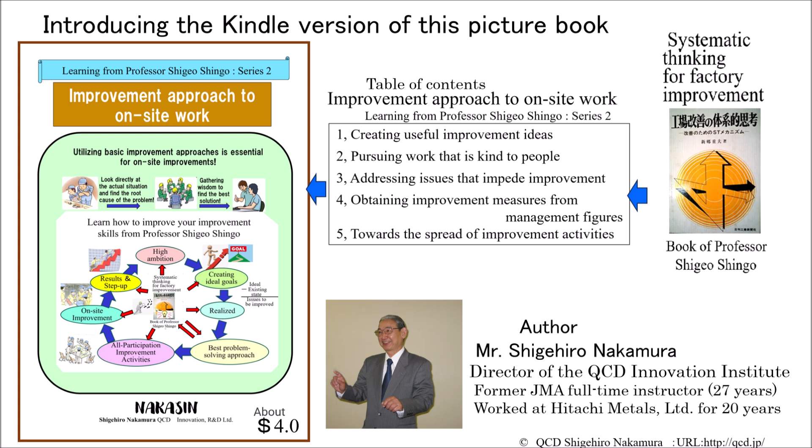This time, I will be introducing the world-famous Series 2 of Systematic Thinking for Factory Improvement written by Professor Shigeo Shingo, and how to use it in a picture book, focusing on the contents that Mr. Shigehiro Nakamura NAKASIN actually used.

Repeated successful experiences improve a person's abilities and life, not only for famous athletes, but also in different industrial sectors. There, people seek more value in life, and valuable information, along with wisdom, awareness of problems and curiosity, should become the subject matter. This figure shows a shortcut to succeeding in the manufacturing industry, but in Series 2, we will introduce how to make use of Professor Shingo's calligraphy along with the contents of this figure.

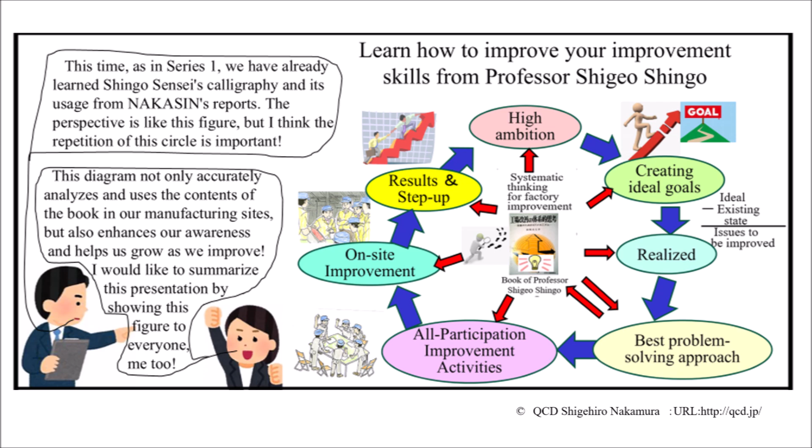Professor Shingo realized how to innovate manufacturing technology when he visited a German company. Die casting is a type of equipment that injects aluminum into a mold in a short time to produce efficiently. However, this method causes burrs, which are aluminum that leaks out from gaps in the mold and hardens, which is a problem that all companies face. However, there were no burrs at the German company he visited. The reason for this is that they used a method of removing air from inside the mold before casting.

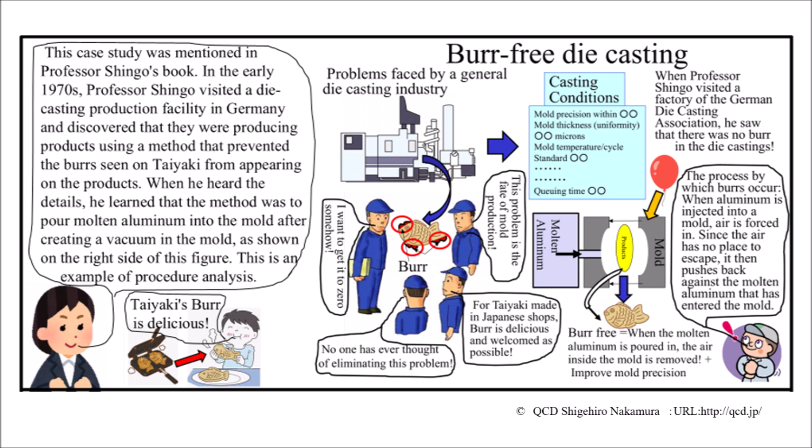It may seem obvious, but burrs are generated when the aluminum is injected into the mold at high speed, and the fixed mold opens due to high pressure, which opens the mold into which the aluminum is injected. During this visit, Professor Shingo realized that the problem is that we don't notice the air. Furthermore, he thought that the act of questioning things that everyone has taken for granted is the basis for innovation in manufacturing technology. This is also the main point that will be introduced in this series.

I would like to introduce an example that is similar to the previously mentioned measures to eliminate burrs in die casting, but which requires awareness when applied to a different type of work. In the industrial world, there are consultants and improvement instructors who insist that standing is the norm in manufacturing. In response to this, Professor Shingo's scientific analysis results in the figure shown here. Obviously, if you try working yourself, you will immediately understand that if you choose to stand up to do work that can be done while sitting, you will get tired and your efficiency will decrease. But why do these people insist on working while standing?

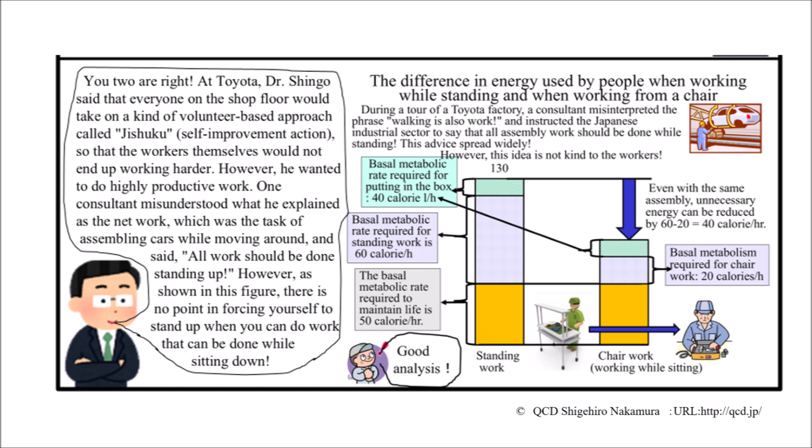After much deliberation, Professor Shingo came up with the idea while in the car on the way to the new location. I want the veterans to focus on the knife work. The temporary workers will only be in charge of peeling. He returned to the factory, and this measure not only reduced defects to almost zero, but also increased productivity by 1.3 times.

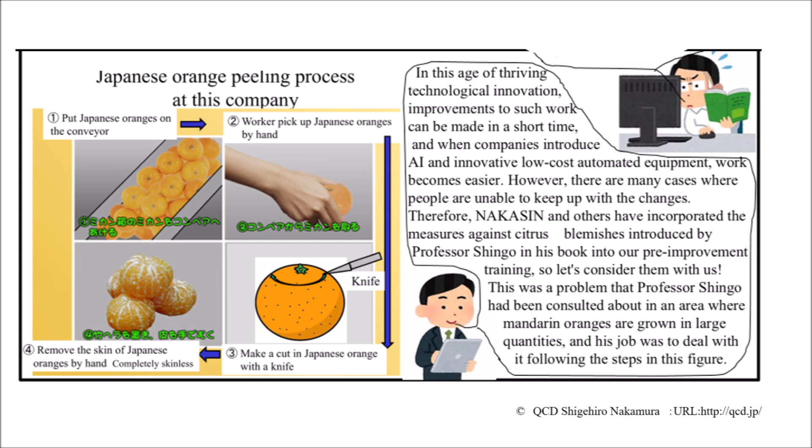Mr. Nakamura and the other members of the JMA Production Innovation Research Group heard an explanation of the mandarin peeling countermeasures around 1975. At that time, Professor Shingo said in a lecture, this time, in addition to the Process Analysis Improvement Rule ECRS, I added the division rule. But improvement is eternal. I would like everyone to further develop this improvement plan.

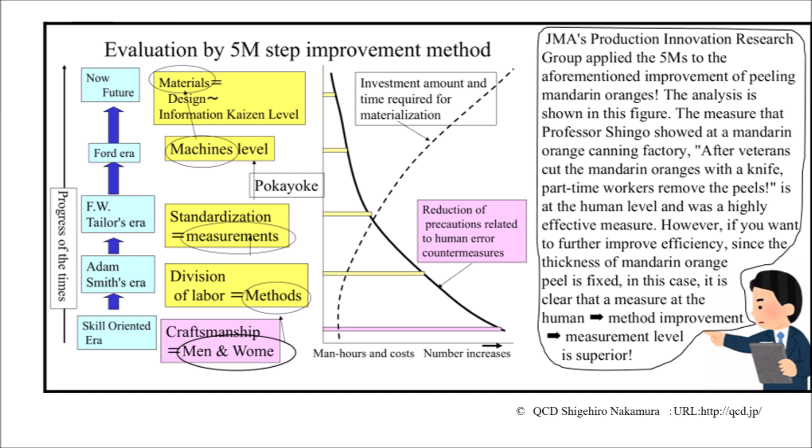In this way, in this book, Professor Shingo wrote a method of improvement for reviewing work based on realizations. Furthermore, Mr. Nakamura and his colleagues used this to improve the content, and 3 people from the hypothetical company A formed a project team to summarize the efforts and progress that everyone in the factory will use in a picture book, and this introductory video introduced one example.